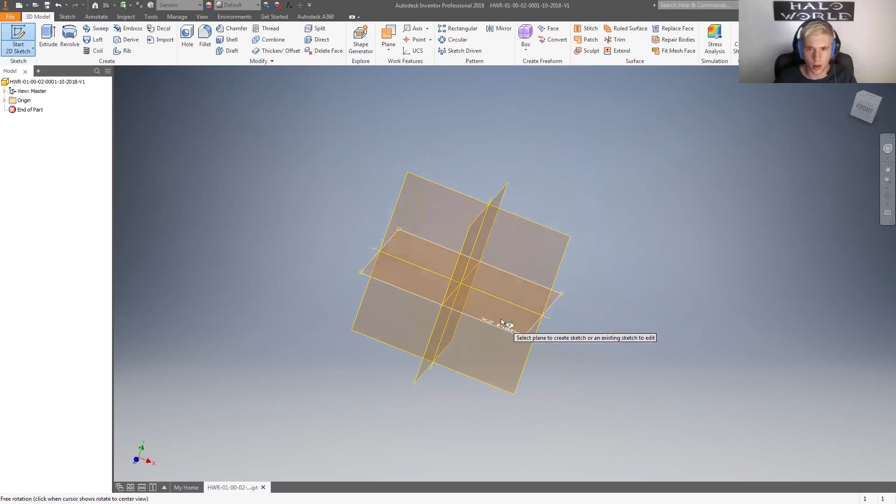I will start a sketch. For those of you who don't know how to use Inventor, there are tons of videos and tutorials out there, so just watch them and get to know the software.

What I was doing here was just taking the right view for the part, because now I will add something. It was somewhere here, and it's called equation curve, and if everything works out well we will have a working equation here.

I've calculated them before, so they fit. The equations are planned by different points I know of the drive system, and they build the link between those single points.

I'm just copying this equation now. It took us some time to calculate them - I think 4 people were trying to solve all those equations for a few days, because we always had different solutions and didn't know which one was the right one. The exact way you can read in our engineering notebook.

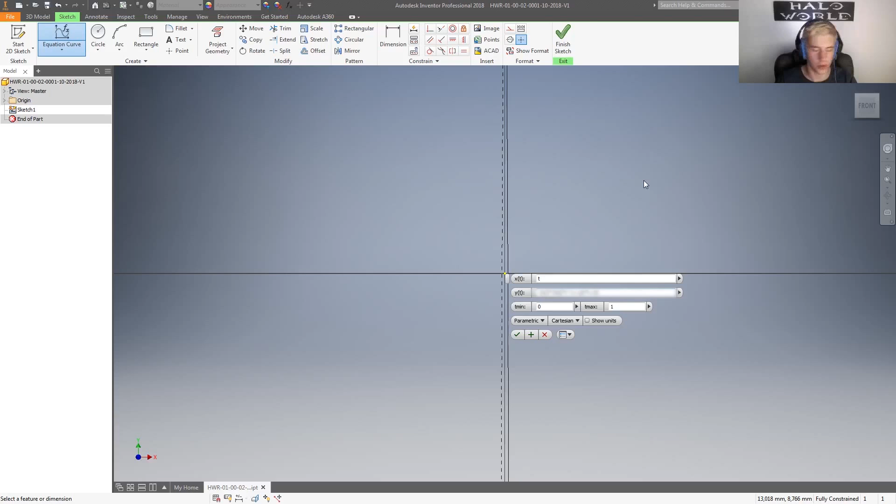That really does not look like the thing I want to have. I will just look up a thing, give me a second. I think that didn't work out as well.

Yeah, this looks more like the thing I was expecting. So it's 350 in both directions. Oh no, 175, so yeah, this looks great.

So this is the first equation curve for the system here, but I'm still not quite like it.

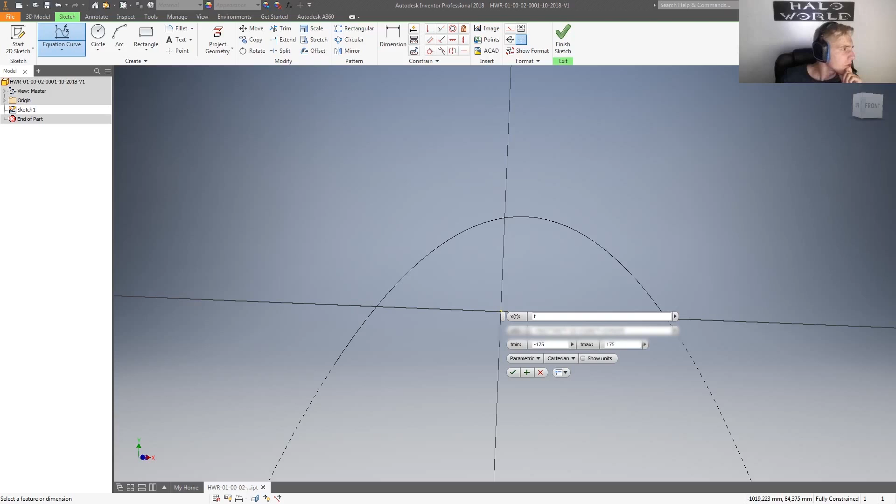Yeah, this is nearly what I am expecting, and then I have to get this to 0. This is a quarter - yeah, this is a quarter of 350.

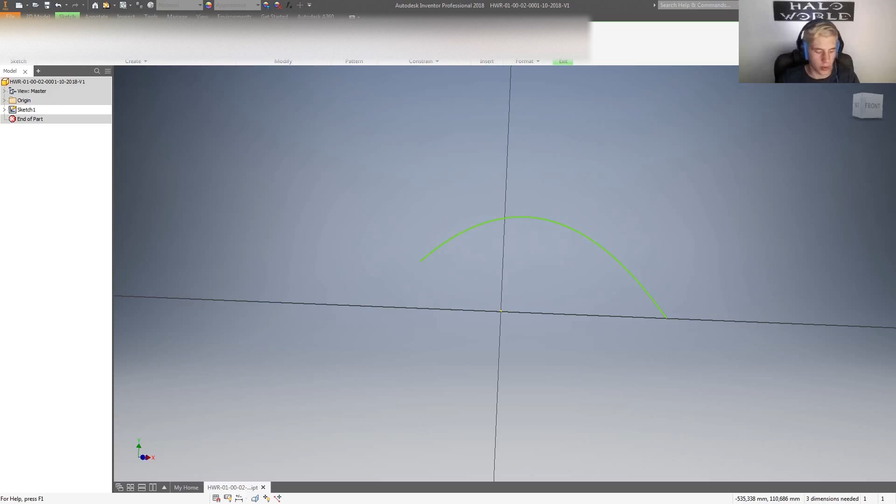So for you to know what I'm doing here, maybe it would have been a better idea to show this to you a bit earlier. But yeah, this here is the thing I'm trying to bring to Inventor.

Imagine this part here is not existing, the whole part under the x-axis is not existing, and just those two lines and also this line are building the system for the wheels to be attached. So there will be one wheel here, and one wheel here. Always motorized, and yeah.

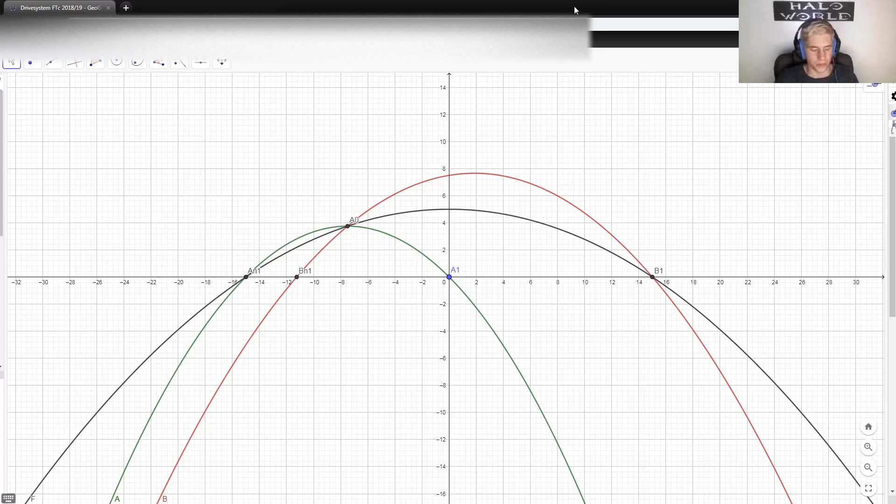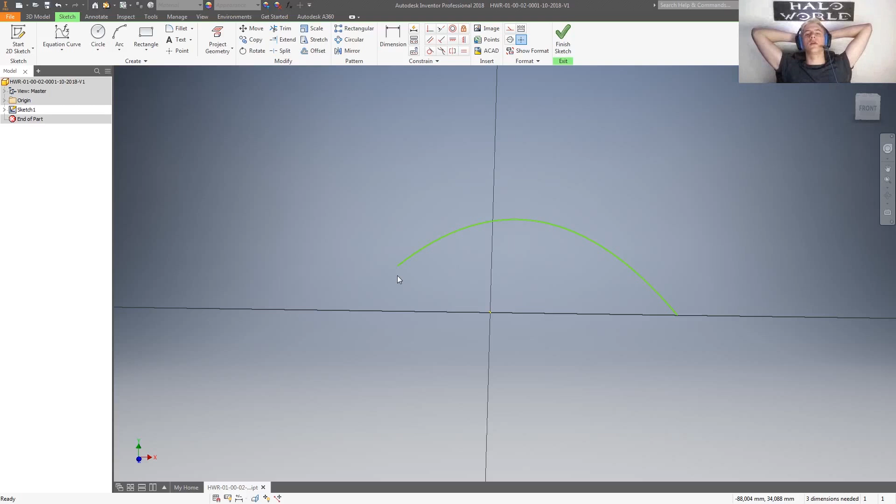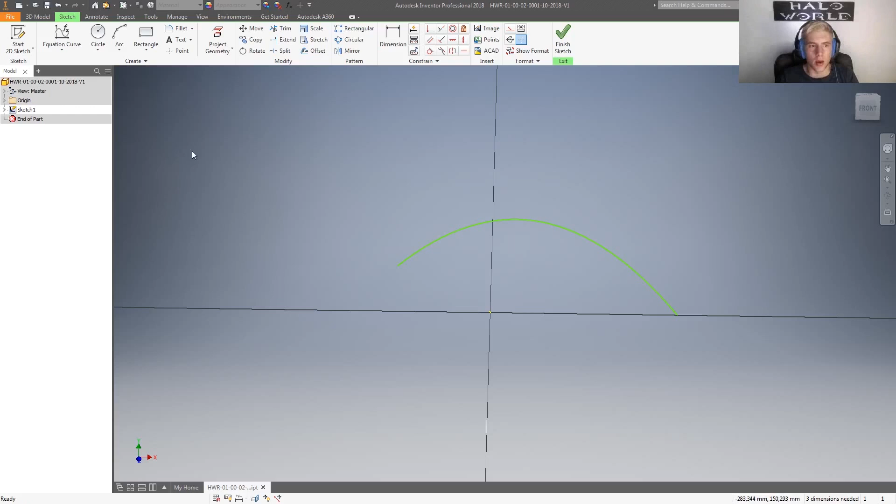This is the first equation for this. Here will be a point where a wheel is attached. Here will be the point where the so-called bogie is attached. The rocker-bogie drive system: the front wheel here is the rocker, so this one is climbing over the rocks, and the bogie is running behind it, just holding the robot or the car over the ground. Because that worked out very well, I will directly type in the second one.

So this is... sorry, I'm a bit tired. It's late in the evening now, so yeah.

I hope I will not make too many mistakes while I'm building this robot. What means building? Yeah, planning.

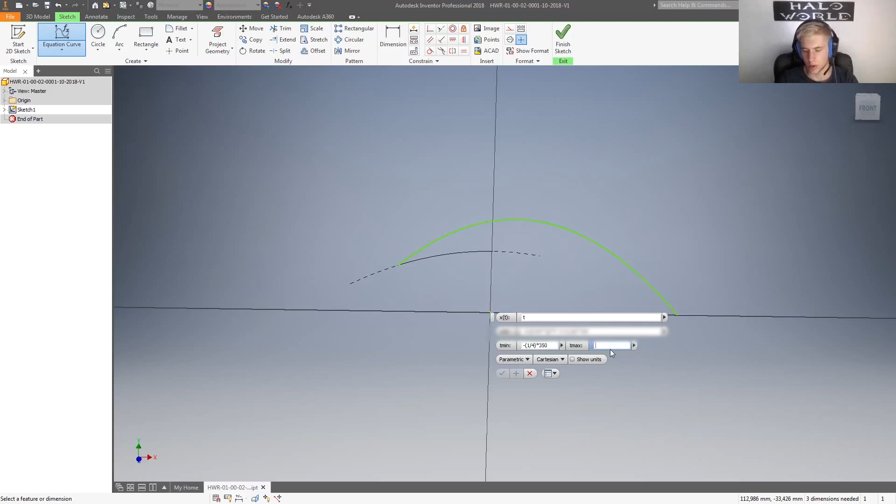So this one is also from minus 1/4 of 350 to 1/2 of 350.

So here you can see now the basic form of the connector. Now I will add a little offset,

which is not working, out of which reason. It's working to the inside but not to the outside. That's a very funny thing.

I think I have to move this one here. Yeah, that's the thing I wanted to see. And this should be - first I maybe measure this thing.

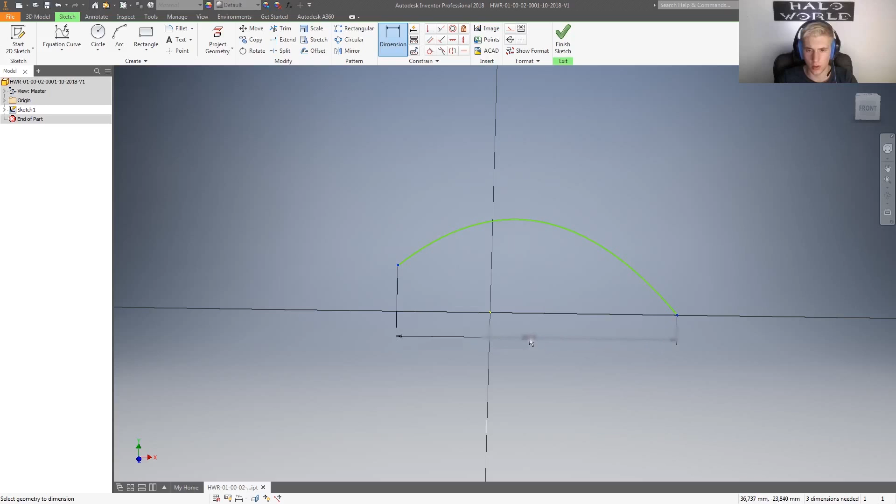So for measure you can use M, or also D. So, 216 millimeters. Yeah, that looks fine. Yeah, that's great.

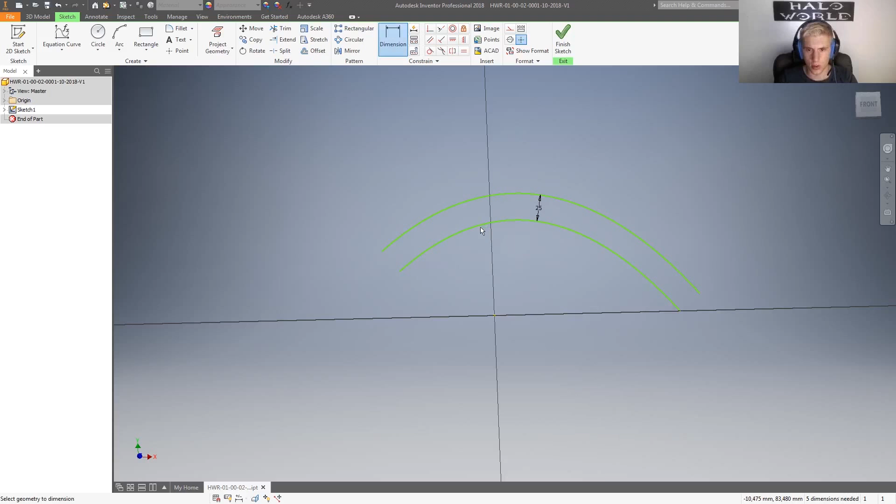I think 25 a little bit too much. Maybe we'll do 10. That's better. And then we will offset into this direction, also 10 millimeters.

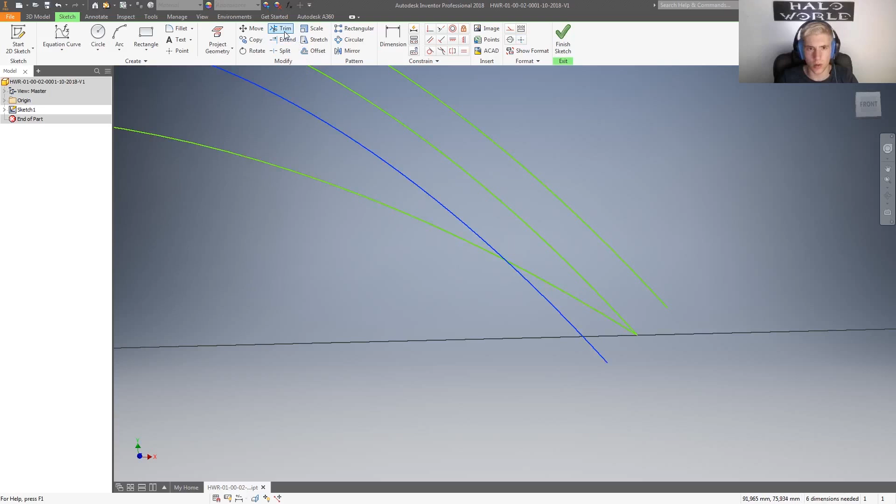And then we will add the lower part here. So do not wonder what all those lines here mean. I will trim this line here with this line, and also this line here. Right. So...

No, stop, that was the wrong thing. I have to trim this one here.

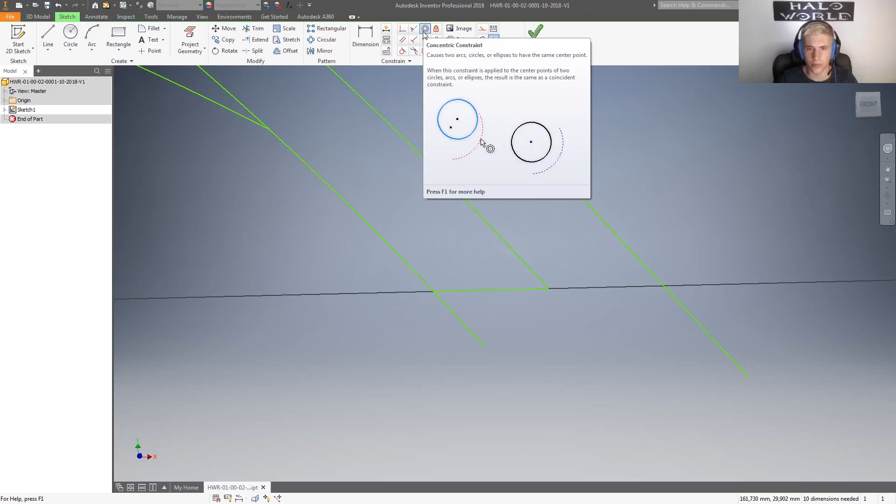Sometimes it's willing, sometimes not. This here is just a line for construction purpose, and you can here search the constraint that it's... no, it's not working. There was a something where you could do this. Oh wait, I think this one here.

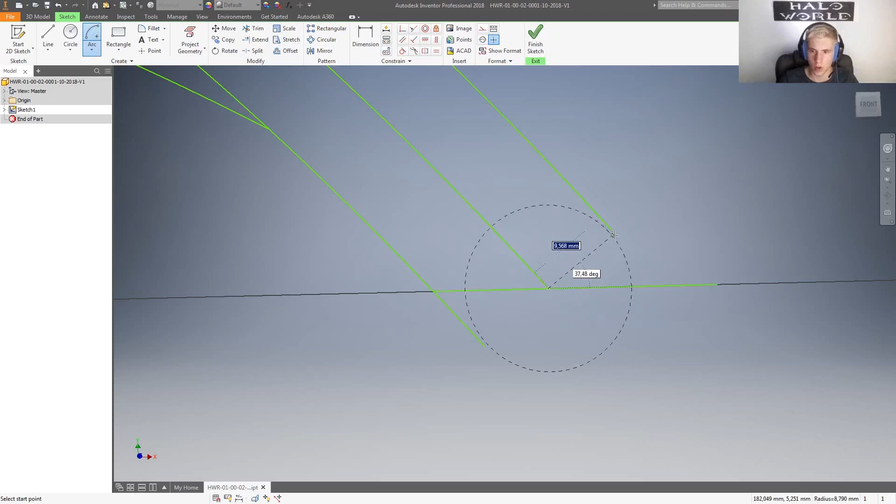So, yeah, okay, it's not letting me do this, so, yeah, this looks good.

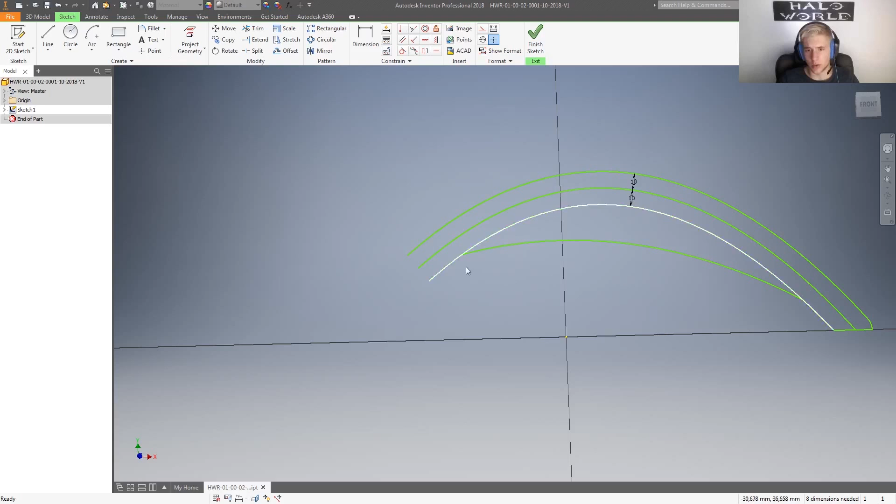So sometimes if you just see me doing some lines here, it's kind of like testing things, and I'm then trying to find an optimal fit for some parts.

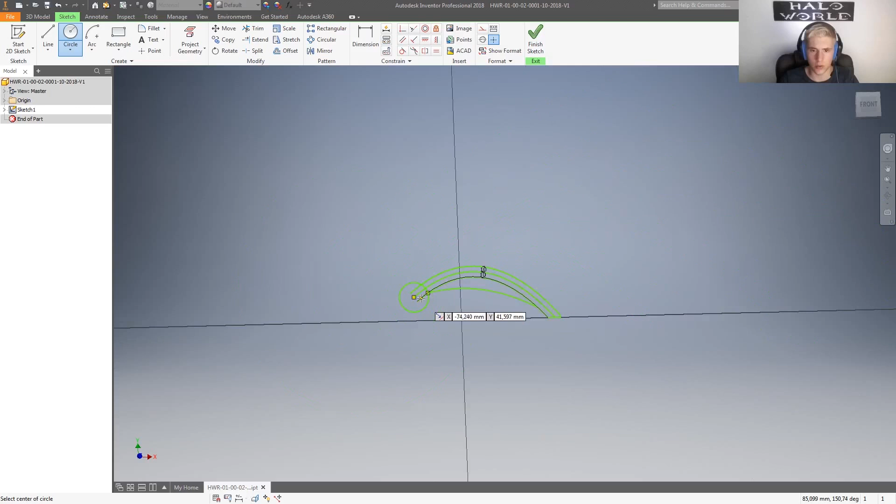So this here is the fixing point. So here I will add a circle. And this circle should be a little bit bigger. I think this is very good. Oh no, it's way too big. But this one here is way too small.

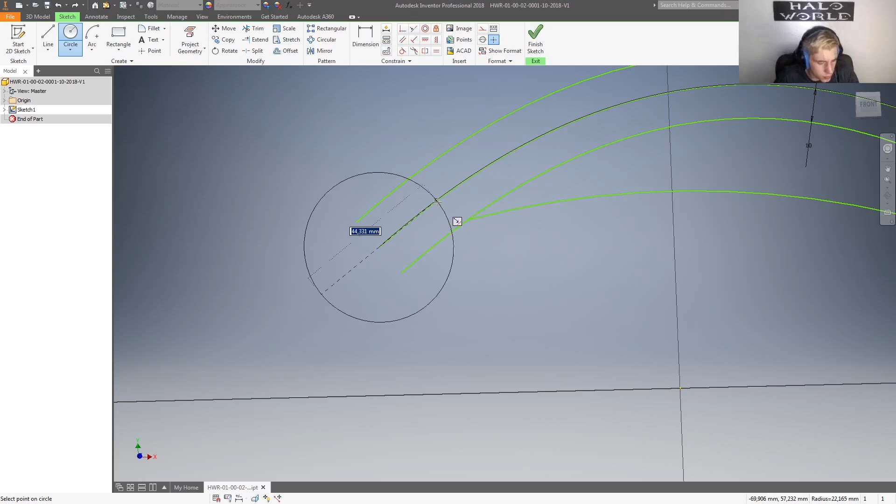I think 40 is a good one. So what you can't see is I always have some rulers and measuring tools laying around here so I can see the measurements I'm typing into the computer.

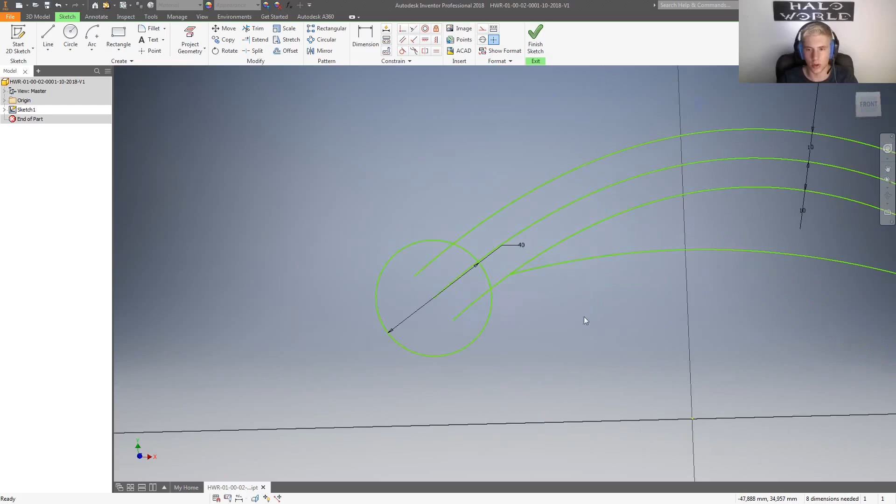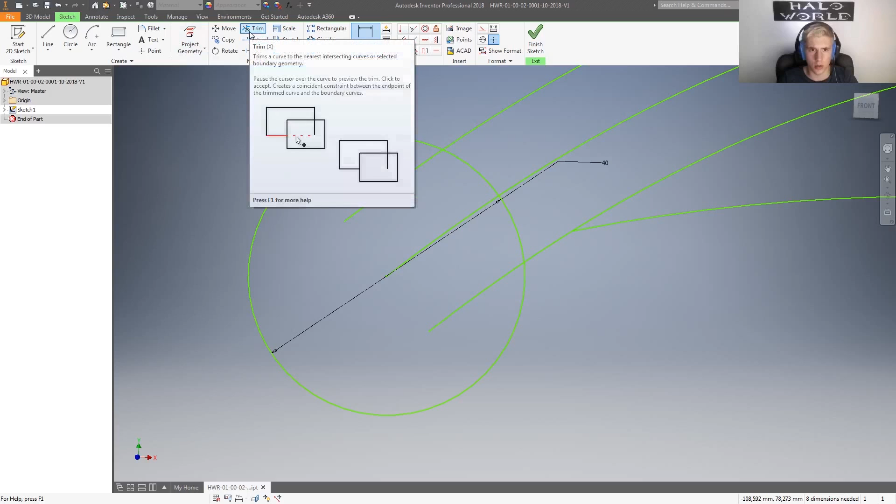And yeah, you'll have to always remember this, that this one here is the base sketch. So on this sketch the rest is depending. And... oh, sorry.

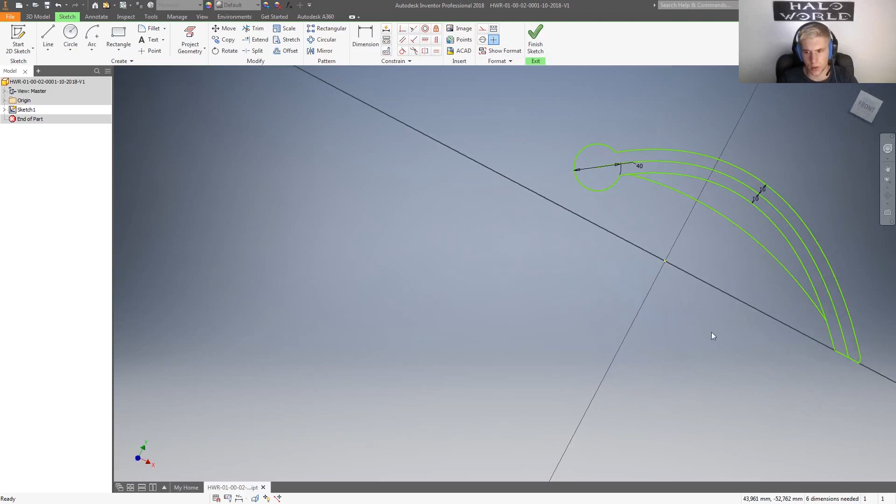So yeah, this is enough as a base sketch, and this section here you can see again with, all things without dimensions.

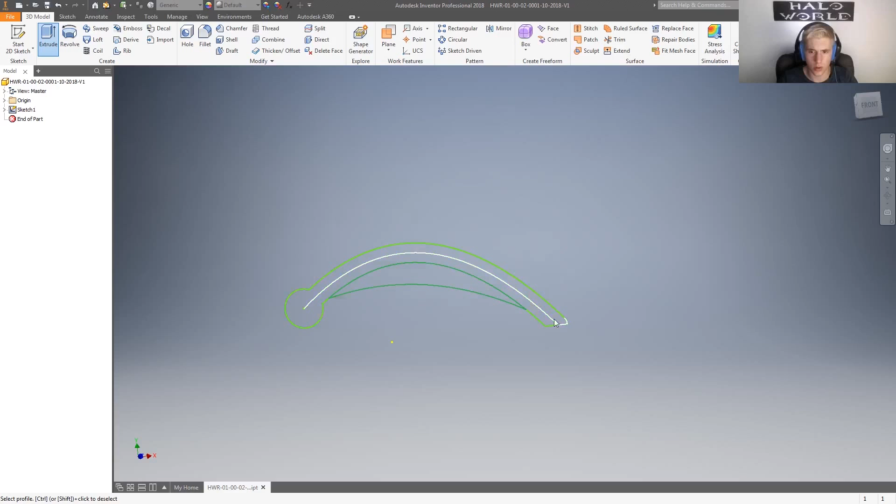This is depending on how much time I need to do all the drawing process. So it's truly possible that a part could need between an hour and some more.

Those ones here should be... so, yeah.

So I will make those two ones collinear. That was not what I was thinking of.

So I'm adding dimensions now that it couldn't get the idea to. So this program here is very annoying sometimes.

So if those blue lines appear, the sketch is fully defined, so there's nothing which is undefined left. So all parts have a fixed measurement.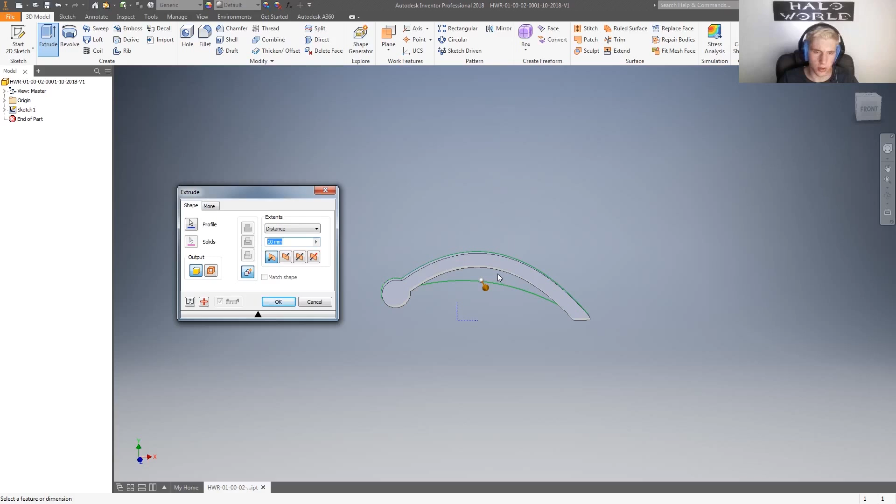So because this should be a very stable 3D printed part, we should use a good strength of maybe 15 to 20 millimeters. I will take 20.

You could see that the sketch is now hidden, so I will make it visible again to also extrude this part here, also with 20 millimeters.

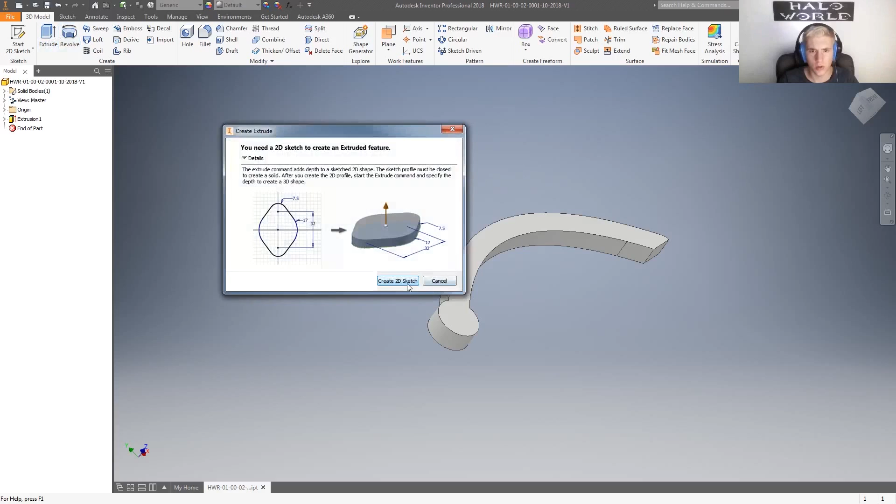So in the extrude function there are different options. You can change directions in which direction you are extruding.

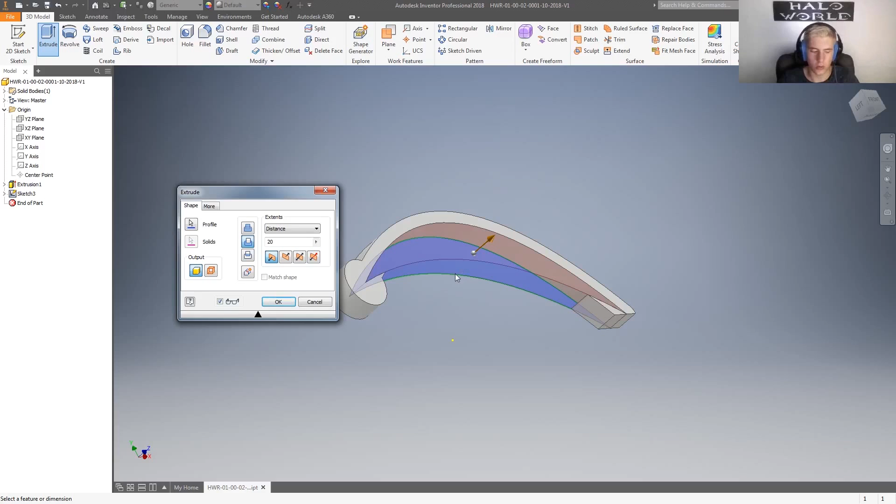You can say that you want to join the two bodies, so if a new extruded part cuts into another body, they will join together as one new body. You can also cut them, so you cut out of the existing body the shape of the new body. You can also do an intersection, so then just the part which both bodies have in common will survive.

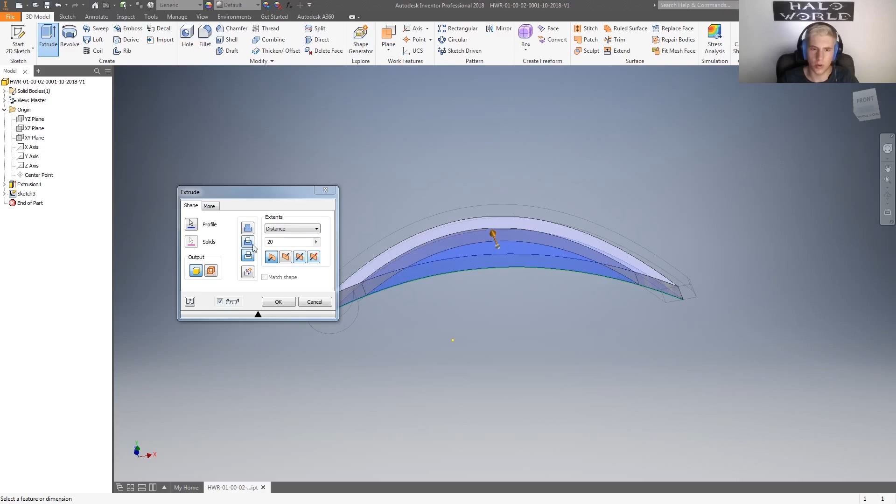I will now use join, so you can also do a new body, but in this case it's not needed. I will use join, and now you see we have this part. But if I print this part, it would be very heavy, and it would cost a lot of material, so I will add some holes in it.

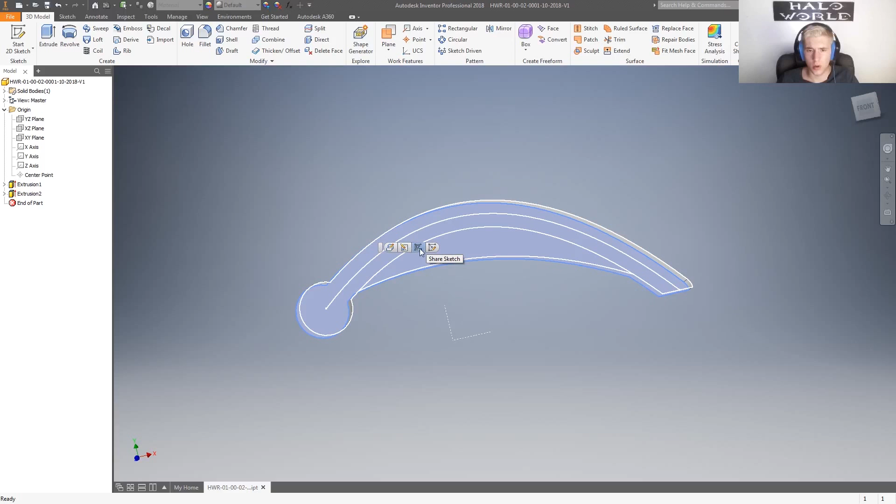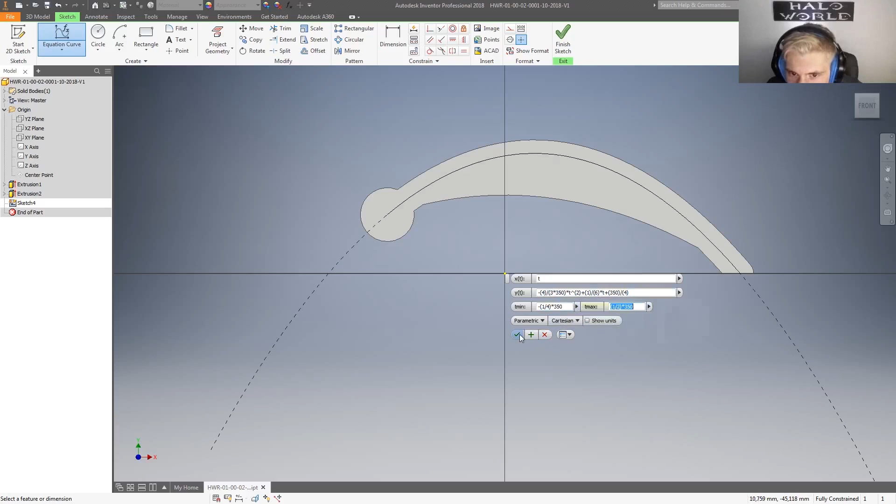So I'm going to do a sketch on it. I will again add my little equations - I like them, I needed so long to calculate them. I can see them, but this one should be construction.

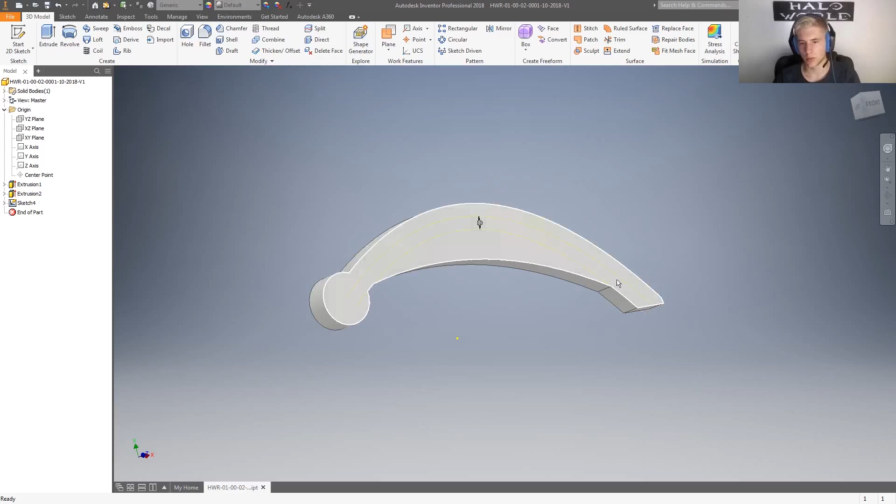So what I'm doing here is, every part - if you get a force here and a force here, the outer side here will be pushed together, and this side here will be pulled. And if you put a pressure coming from here, this part has to be fixed, of course, but if you put a pressure coming from here to down here, the upper side will be pulled and the underside will be pressed together. And in the middle there's the neutral zone, so they can drill holes as you want and nothing will break.

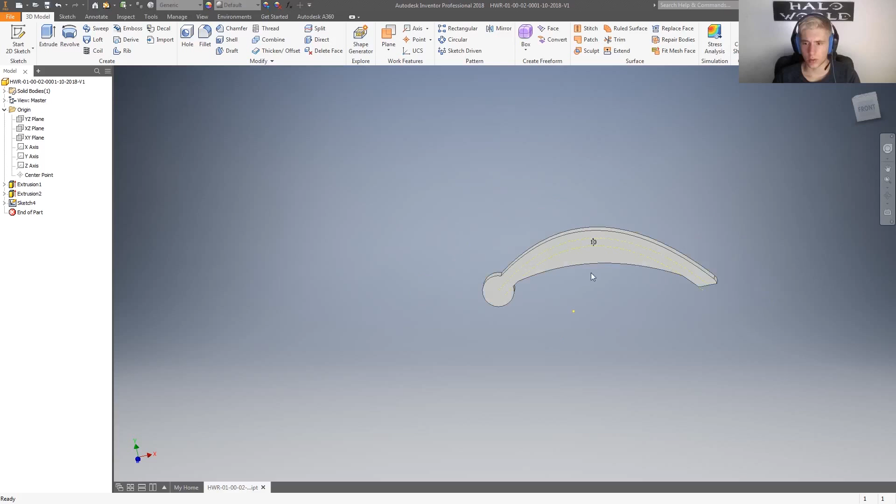We also shouldn't forget that we have to add our hole for mounting this thing. This one will be somewhere around here, and I have to look up where the center point is.

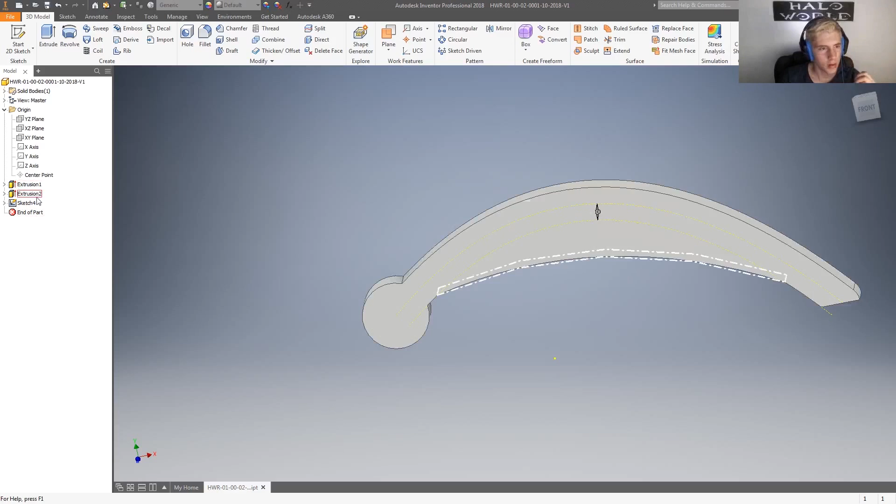Here's just the construction line. Then I will also add this construction line, and there's a distance of 21.875.

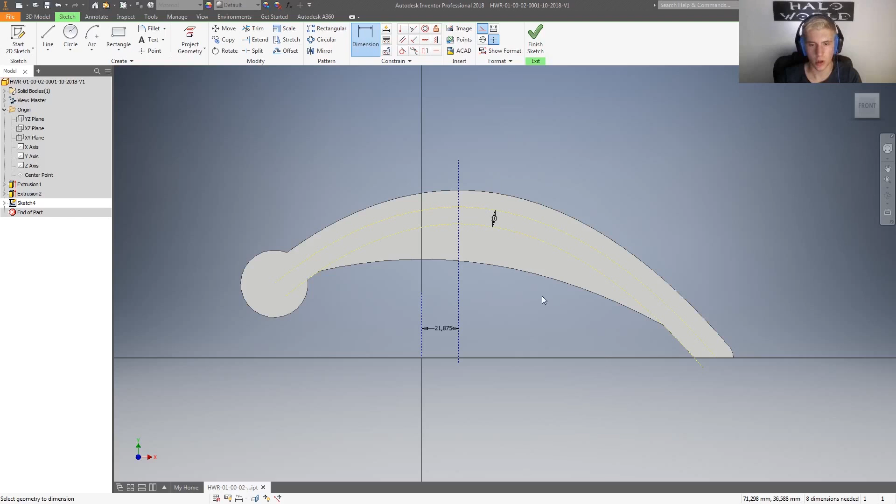So there's another not-funny thing on German keyboards. In the number section, the dot is a comma, so it's not fun typing in measurements with this kind of keyboard layout.

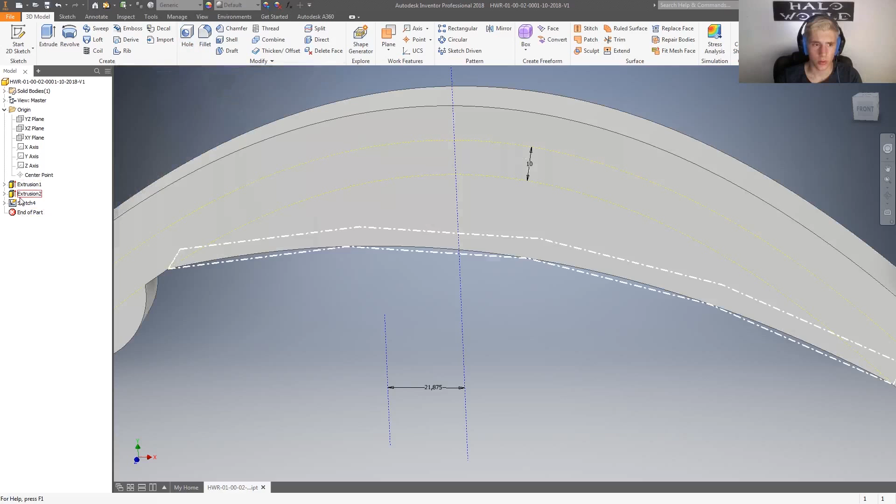Now I will drill holes because I like drilling holes in things, and I first have to place some points here. This point here will be the mounting point, so there the whole thing will be mounted. And then I will have a point here.

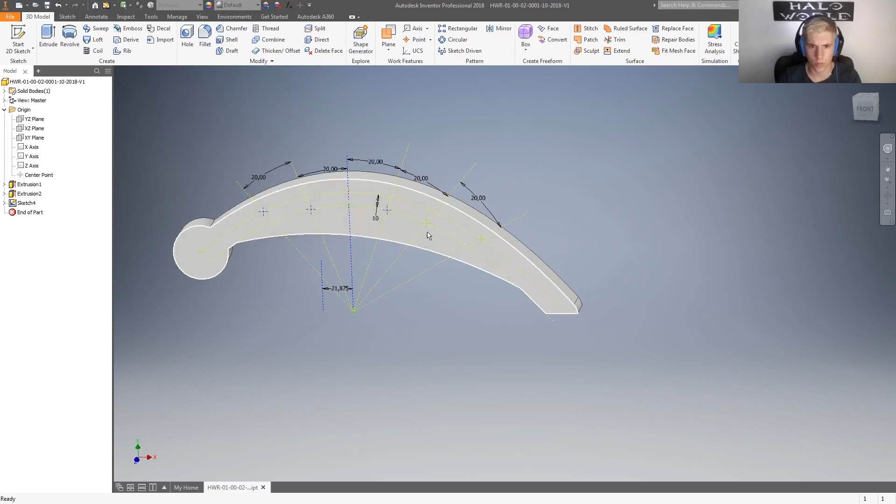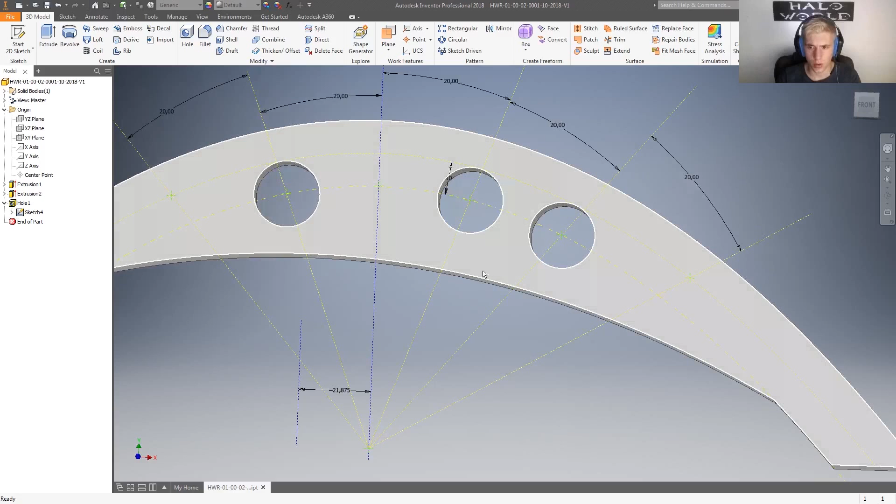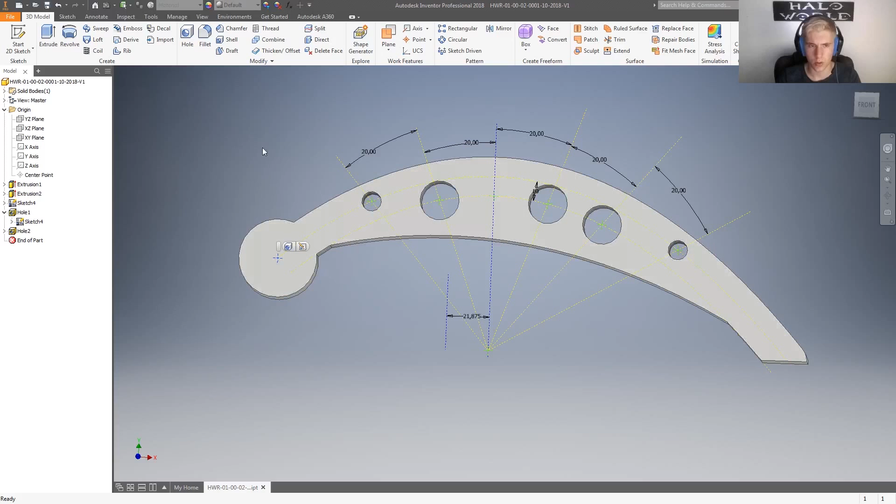So those holes should be there to save weight, and also material - in most cases weight equals material. And there should be a bigger hole for mounting.

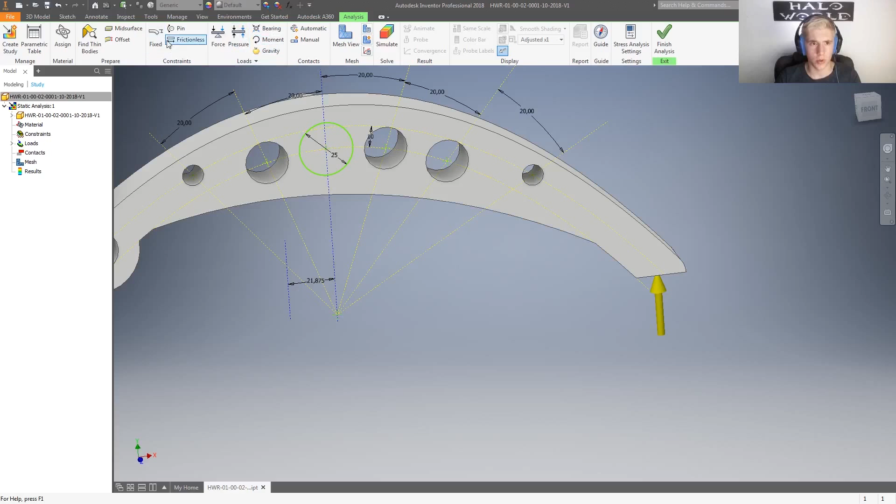So what I'm doing here is a little stress analysis, just for me, to know if the thing I was looking for is okay - so if the holes are fine like this, or if they cost too much material for stability.

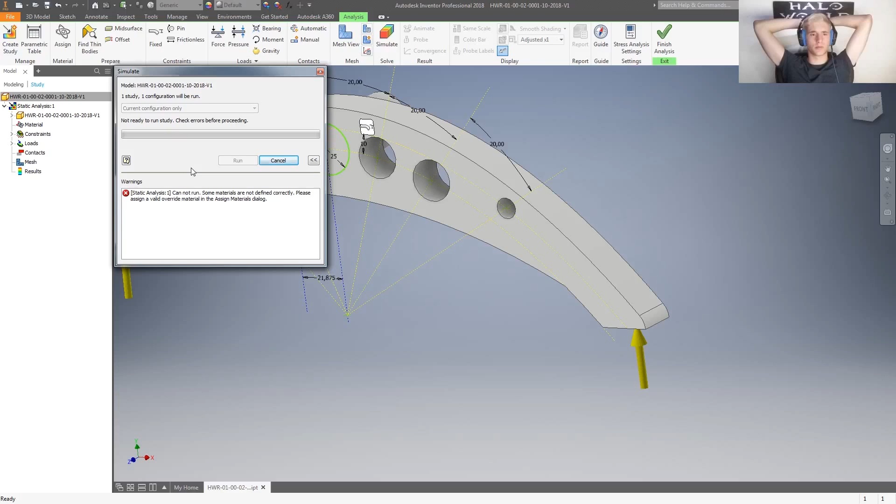Okay, yeah. Maybe I should define a material.

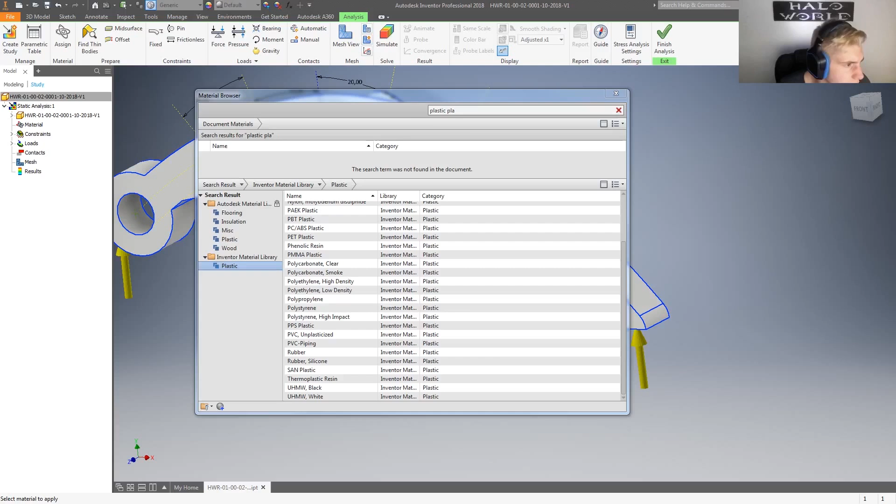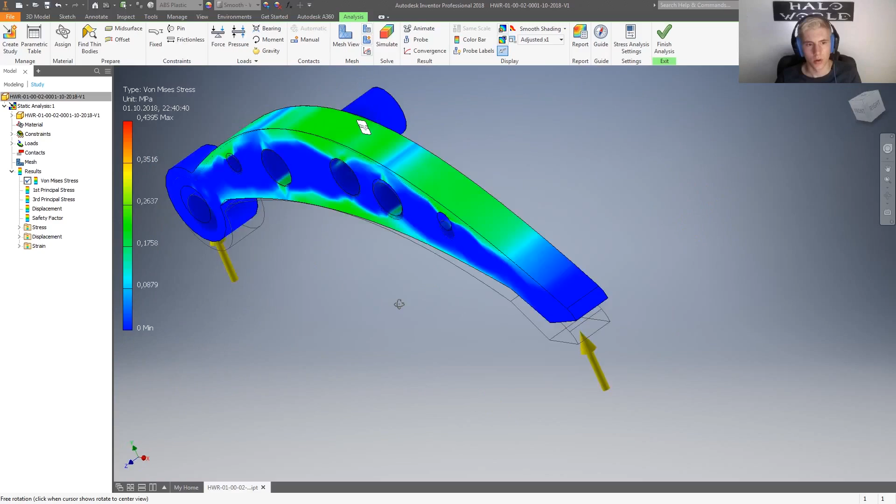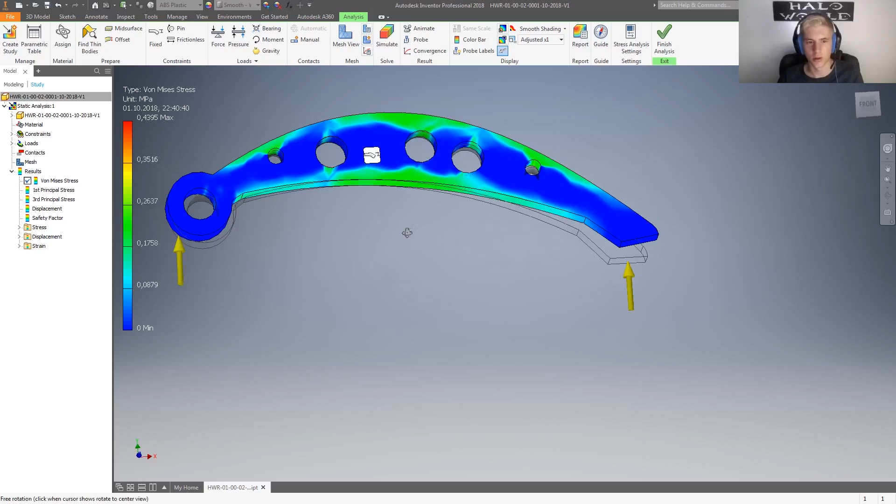So now I've configured the study and I will let it run. It's possible that it will fail the first time, but you can see we are still in the safety area, and you can see here that it will be a little bit deformed - but it's 10 newtons forcing onto here, so that's quite a lot, and I think I have an idea what I could still do without losing too much safety.

So all those added things have a direct effect on the behavior in the stress analysis. I don't know exactly which effect, but they will have one.

So yeah, this part is more or less finished now. There are some little details missing concerning the mounting of the single part, but those details I can add once I know how the other parts look.